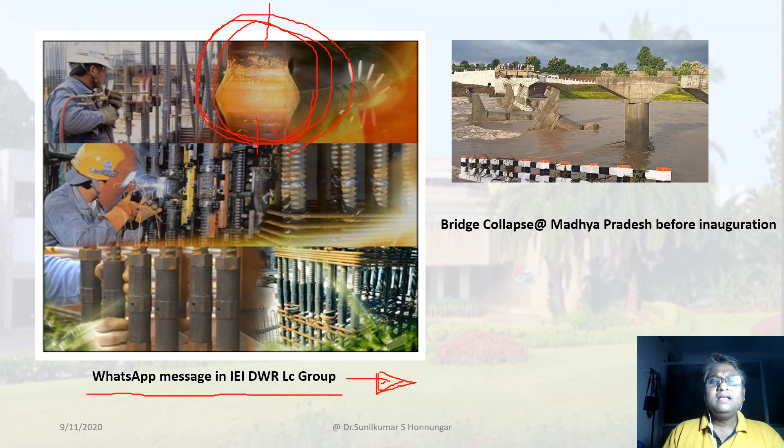That blew my mind, and from the technical side I also started digging: can we go for that? My background is mechanical, and I was also of the opinion that we can't use such welded joints in RCC columns or beams. The reason is that when you weld, the steel gets heated up. Because of the heating there will be a crystallographic change, and the steel becomes brittle. So after the joint is formed, it will become brittle.

I came to this conclusion in two contexts, with my limited knowledge of the civil arena. One is the Titanic, as we have all heard. Even though it was built of the strongest steel, when it collided with the ice it was at a subcritical temperature. Microscopically, there was a crystallographic change, the steel became brittle, and the ship broke into two pieces. So this is one reason I thought it cannot be used.

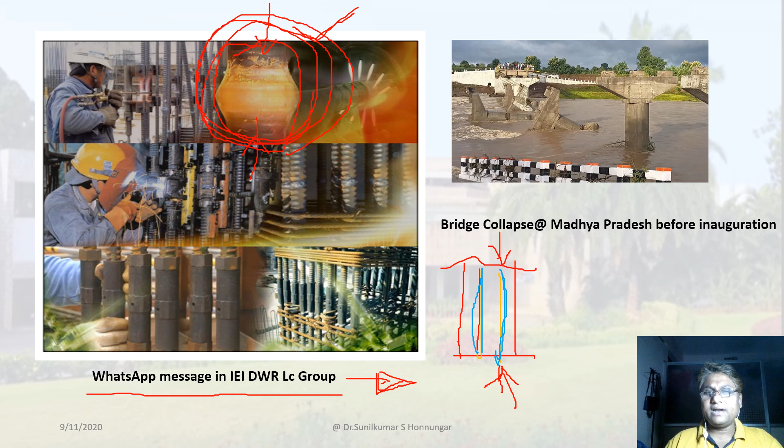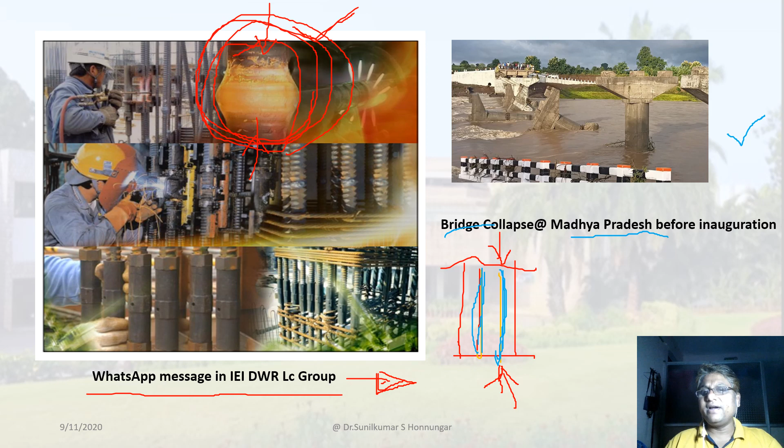And one more recently, probably this may be my conclusion ultimately. And so in fact, the solution and the technical report are yet to come. So last week itself, one bridge collapsed in Madhya Pradesh. In fact, there was a heavy flood. So ironically, this bridge collapsed before the inauguration. Before the inauguration, the main reason may be, in my view, this thing.

So it may be improper utilization, and then steel quality, and then concrete quality, and then quantum of concrete as well as steel. Okay, that may be the reason. The only purpose of showing this is that steel is going to be very predominant and important. So basically I just stick to my talk pertaining to these columns only, that is, steel bar weldments in RCC structures only.

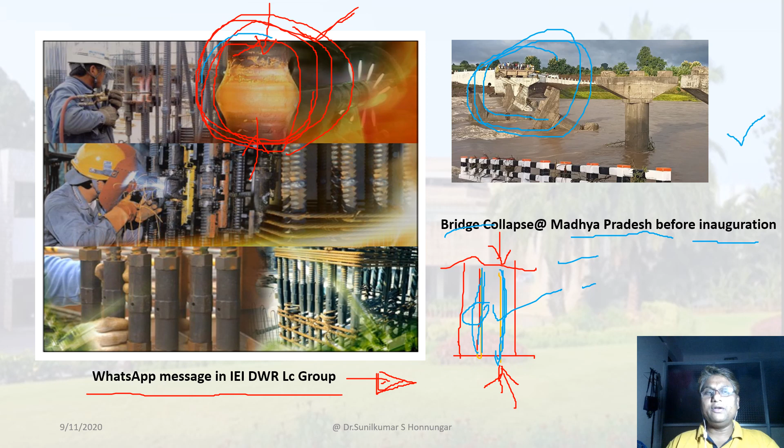And one more thing is, as we are aware, the steel bars are available in standard sizes, that is 9 meter and 12 meter. So in order to have the continuity, they make this kind of lap joint and all, which I'll be telling in detail in the next slide. As I mentioned, I'll restrict my discussion to these particular columns only. So what they do, as the steel length is fixed in the market, 9 meter or up to 12 meter steels are available. Length of the steel bar I'm talking about.

But most of the time your column structures in multi-storied buildings are not up to 9 meters or 12 meters, they are beyond that. So whatever columns are to be constructed, they do the lapping of steel inside the column. Lapping means, suppose this is one steel, I am scribbling, just observe on the right hand top side, and the second one is the bottom one. So suppose this is the total length required, they will do the lapping. Lapping means side by side they keep the same diameter steel and then, with thin wire, they do something called bar bending. Most of us are aware. So this is called lapping.

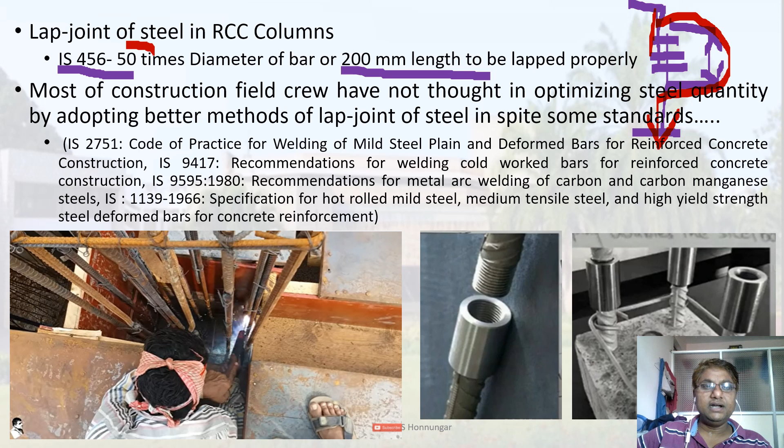And ironically, when I did a little search on the internet, I noticed that there is a standard available in the Indian purview, that is IS 456. According to that, the length of lap, whatever this particular length of joining is, should be minimum 50 times the diameter of the bar, or at least 200 millimeter. This is prescribed for two reasons. One is continuity of the bar should be there. Second, whatever load comes on the top bar has to be transferred successfully to the next continuation bar, so that load coming on the column will be in line or coaxial, and stability will be proper. Under that circumstance, the length of lap should be 50 times the diameter of the steel rod used, or minimum 200 millimeter.

In addition to this, I noticed there are also some standards available for welding. Of course, to be precise, they have mentioned that lapping can also be done by welding, but nothing more is mentioned. In fact, I could not go through these standards in depth within the short stipulated time, but whatever best I could assimilate: there is the IS 2751 code, that is practice for welding of mild steel plain and deformed bars for reinforced concrete construction. Similarly, IS 9417 is recommended for welding cold worked bars for reinforced concrete, and so forth. So these are there.

In spite of that, I hardly see any sort of optimizing the length of the bar, or reducing the quantity of the steel. To be frank, I hardly found anybody talking in this relation, because again I am adhering to the WhatsApp group discussion only.

And one more thing I have noticed on the internet: there are a couple of videos available, you can also see them on YouTube. This gentleman is a welder, actually. Somebody has posted this particular video. What they have done is lapped only these two, and instead of the wire binding, they are doing the welding. Probably what they wanted to show is saving time, and again transportation.

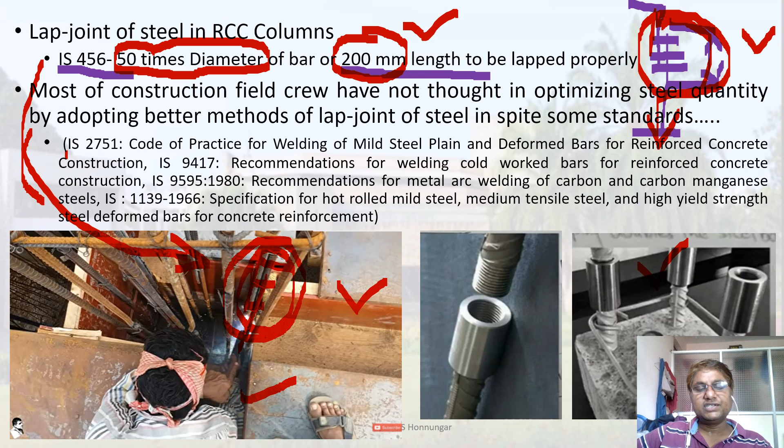Generally, if you take 200 millimeter for a 25 millimeter diameter standard construction rod and lap it, the weight is volume multiplied by density. As a thumb rule, it will be somewhere around 3.5 to 4 kg for one lap. So if you look at the simple 4 bar column shown on the right hand side, 4 into 4, nearly 16 kg steel will be utilized for one particular lap. So try to visualize the amount of wastage, the amount of steel consumed unnecessarily. In that context I took this as a topic for today's talk.

Second, further browsing, I also noticed there are some sleeves. Some people may be aware, some sleeves are available with an internal threaded part, and the steel which is going to be connected continuous. These are two separate pieces, top and bottom. They are also threaded, and the thread will be fixed into the sleeve having the thread, and the joint will become one joint. And again there will be continuity of load. Whatever comes on the top bar will be transferred successfully to the bottom.

So this is one. After assembly you can notice it on the right hand side. Sorry, I think my video may not be visible. This is also available on the internet. But I have hardly seen such welding activity or this sleeve fixing activity in the construction areas I have come across.

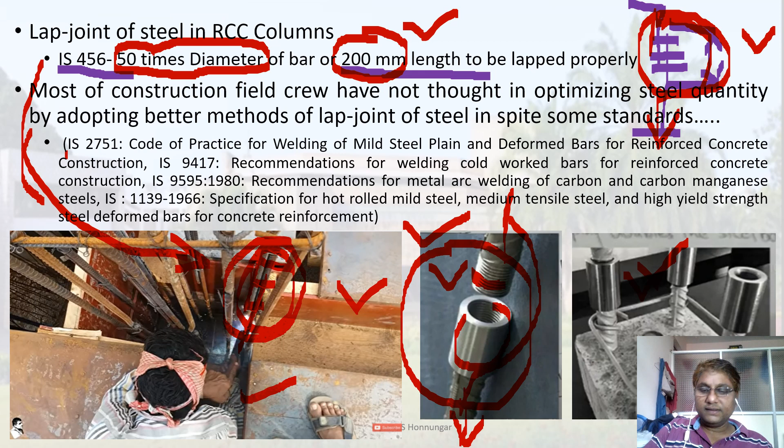So going further, it was a burning issue as I mentioned. I told Chakrasali sir I will be taking it up, and in a day or two, by Monday evening to be precise, I spoke to one of my junior alumnus from the same construction area, Pramod Jhalkikar, who is a mechanical graduate but very actively doing and a successful entrepreneur in the construction field. He told me, Sunil, I have some material which may be of some help to you. We discussed, and then he shared this. I was lucky, to be frank, thanks to Pramod Jhalkikar. This material itself has become a full meal for me for this particular talk.

According to that literature, there is one institute in Japan, the Japan Reinforcing Bar Joints Institute. I will tell in a nutshell what they do. Japan has a scarcity of resources, and it is highly sensitive to earthquakes and seismic loads. That is why, as we heard earlier, they don't go for permanent structures; they go for steel structures of dismantling type, and bamboo related structures. However, of late, because of a lot of development in technology, they are going for permanent structures in association with private agencies and government agencies. So this Japan Reinforcing Bar Joints Institute has come up with three types of joints for construction.

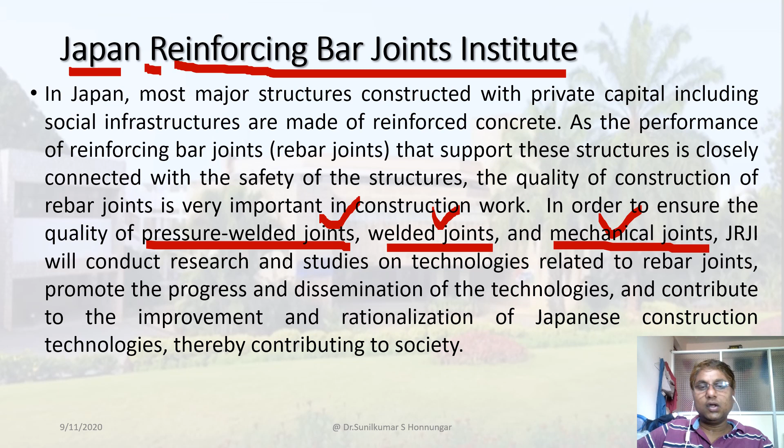One is pressure welded joints, which I am going to explain in the next slide, and the next one is welded joints, and then mechanical joints. So what JRJI, the Japan Reinforcing Bar Joints Institute, does is a lot of R&D. They recommend and give the procedure, and they also give how to do the inspection after implementing these three types of joints. How are you going to ensure the joint is correct or not, that they do, which I am explaining in the slide.

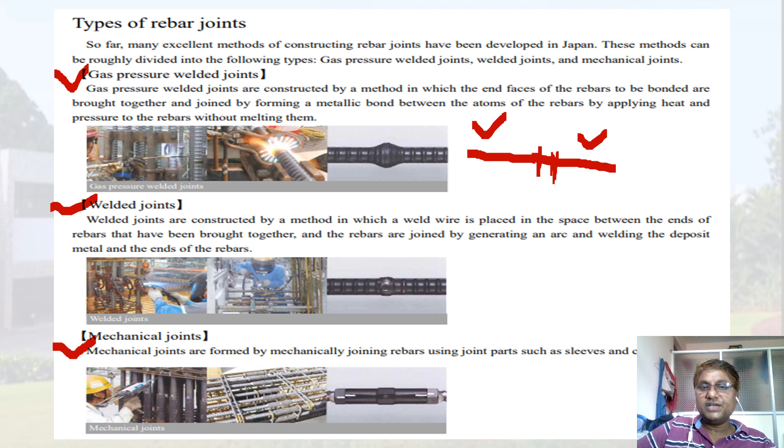So what they are recommending: one is gas pressure welding, another one is welded joint, the next one is a mechanical joint. In gas pressure welding, it is actually not a lap joint, it is a butt joint. Butt means the end surface of one rod and the surface of another rod are brought together, heated up, and then pressure is applied, and that will become one unit like this. Whatever bulged part you can see is the welded part with pressure gas welding. They have a particular procedure and method for the recommendation, and they have proved that. And the testing, how to do that, I am going to explain very quickly in the next slide.

And the next one is welded joint. Welding means there is a third element. In pressure welding there is no third element; the elements are heated up below the melting point and pressure is applied so that they become one unit. In the second type, welded, this is one bar, this is the second bar, but the welding rod is used as a third element, which will again make one unit. This is one entire unit. You can see a small sort of bubble, that is again the weld.

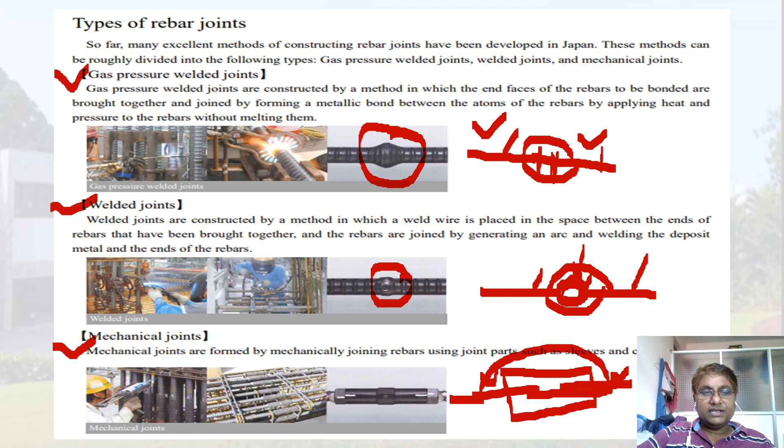And the last one is coupling. As I showed previously, you have the sleeve type which is threaded, and one bar is coupled with another bar, and this will become one joint. Whatever load is coming on one bar will be transferred to the next, and it will become one continuous unit. So these are the three methods the Japanese institute has recommended. And they are also recommending the inspection of that.

One is ultrasonic inspection, another one is ultrasonic measurement inspection, and visual test. Visual test is by looking. Ultrasonic measurement is non-destructive testing. They send some signals, and depending upon the frequency they receive back, that will be calibrated: so much frequency sent, so much frequency coming back. Depending on the ratio, whether the joint is good or not, or any flaws like cracks are there, they will look into and analyze. So this is what they have done in the Japanese context.

Forgive me, probably most of you may be wondering why I am referring to the Japanese. As I told, my domain is not civil, so I am not aware whether we have such proficient agencies, either private or government, which are recommending, giving technical know-how and technical support for research. Only with that context I have chosen this particular Japanese technology, whatever is available on the internet or shared by one of my fellow friends.

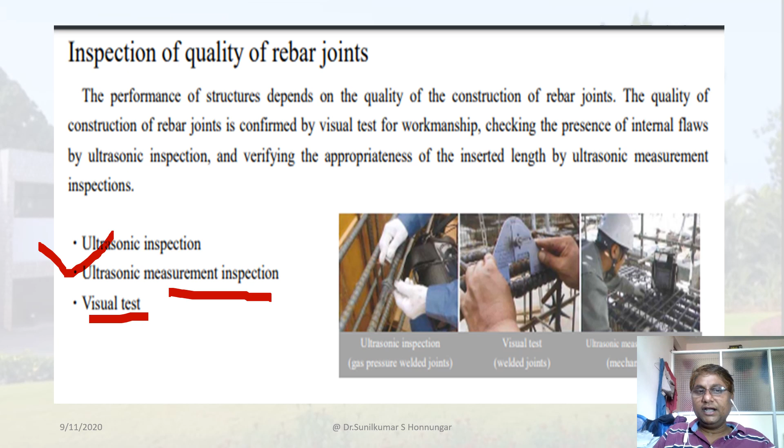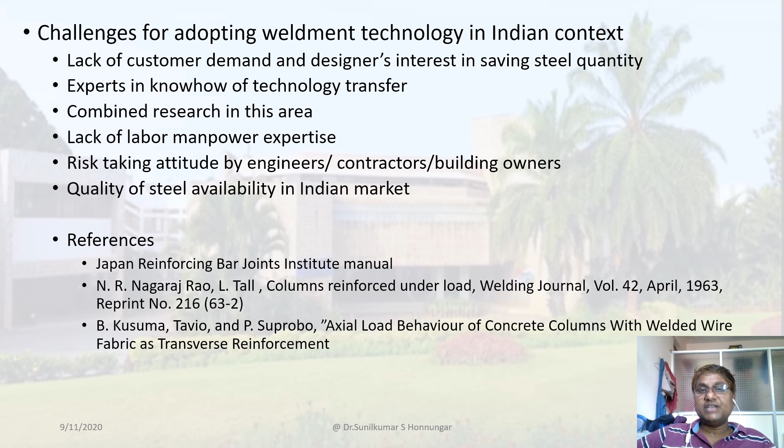Okay, so next I will quickly conclude this talk because of time limitations. Whatever technology is available in the Japanese context, if at all we want to implement it, what are the technical challenges, that is what I am going to tell. And please note, these are purely my views. I may be wrong, please correct me if it is not correct. You can boldly tell. In fact, we have the local chapter WhatsApp group, we can debate upon it at any time.

So in my view, one challenge is a lack of customer demand and designers' interest in saving steel. We are lucky, we don't have any scarcity either in manufacturing or in ore, that is raw material. So we never bothered. Probably it is high time for all of us technocrats to look into this and do something, because ultimately it is a national saving, and an unnecessary burden on the economy, which we can think upon.

And the next technical challenge, in my view, is experts and know-how for technology transfer. That means I'm not sure how many are at the forefront of R&D in such areas, and other people, those who are using it on the ground.

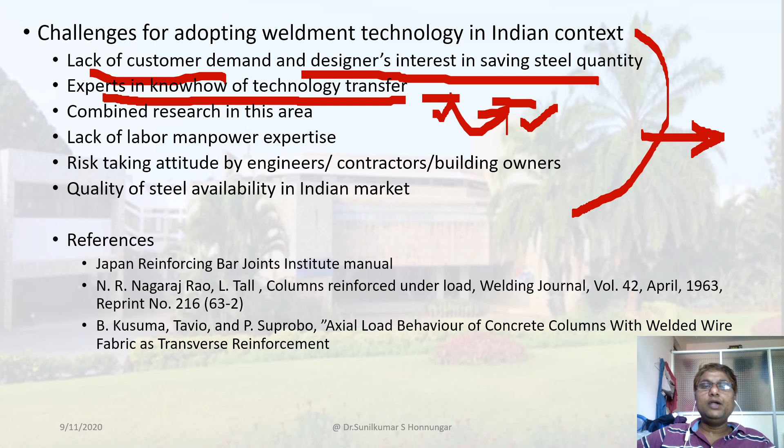So there is no amalgamation, in my view, of proper technology. Whatever research is there, that will remain at the institute level only, which very rarely happens to be implemented in our day-to-day life. Again, that may be one lacuna. And again, combined research in this area, that is joint collaboration. I think the people who are in the field are supposed to come to the institute, or some expert from academia, and then do some sort of win-win situation research in this.

I think the other day Pramod was also telling, this is one way, lack of this is what we are into, and that is the reason people are still in the traditional practice only. So a lot of developments have happened. I think it is high time for all of us to look into it and come out of this particular barrier. And the next subsequent challenge is going to be lack of labor. Okay, manpower expertise. What is this?

So the people who are labor class, if you just look into it, they are neither very educated nor do they have the proper training. At least some ITI level training is also not there. Some school dropouts join as a helper, and then over a period of time, with experience, they gain that knowledge and continue as a bar bender or some mestris. So that is the traditional practice in our Indian context. Probably that has to be changed.

So the people are to be trained properly, and you need to have proper manpower, because the technology is there, but you should have the people who understand the technology and transfer it to the ground reality. That is one more challenge. And the next one is going to be risk taking attitude. I don't know how many of our civil engineering crew are ready to take up the risk and tell boldly, yes, it can be done.

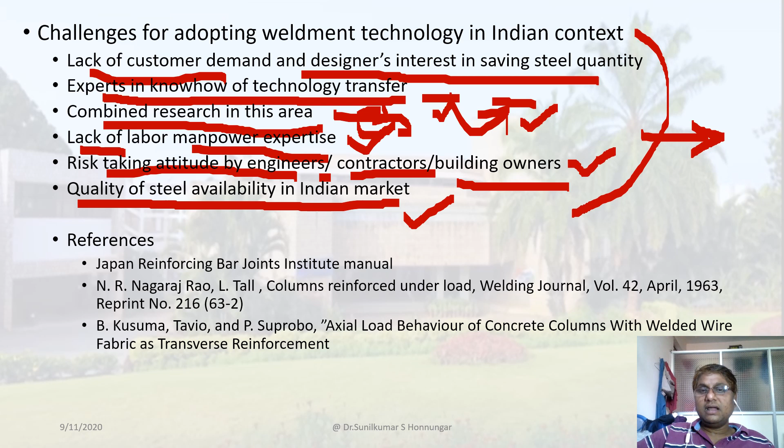So basically, we can't use general steel for this. We have to go for a special high strength steel wherein the outer surface of the steel will be hard and the core will be softer, so that whatever bending load or tensile type of load will be taken by the core, and for welding the outside will be toughened. So that steel we are supposed to use actually.

So here I will stop my discussion. I will just quickly tell the references and then end with this. The first reference is the Japan Reinforcing Bar Joints Institute. This manual is available if you Google search. And surprisingly, whatever I am telling, these people have already explored way back in 1963. That also an Indian person, N.R. Nagaraj Rao. Of course, he did not do it in the Indian context; he did it in some foreign country.

And one more is B. Kusuma. Again, this is somewhere in Malaysia or Taiwan. Just search this; I got a paper. I could not remember exactly, but I have quickly gone through what they have done. They have done a lot of activity in the saving of steel and that kind of stuff. So with this, I conclude my talk. Hope it was a little know-how, probably people may be knowing, I don't know, and a sort of debate issue in our regular group.